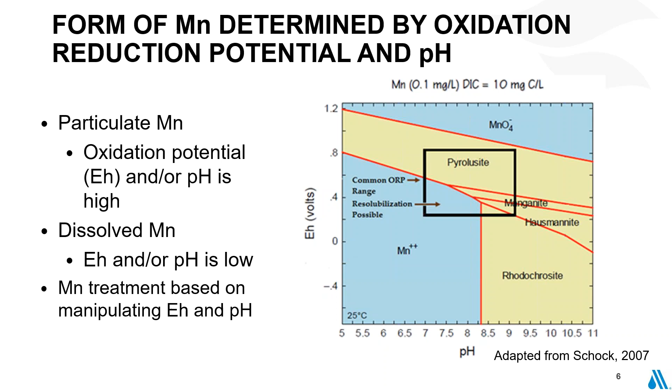At the same time, too, this also explains what happens when we have discoloration of water from manganese, say in our distribution system. We have a solid form of manganese that's precipitated on the walls of pipes. We see a change either in the EH or the pH. We dissolve the manganese, and then that ultimately becomes available for discoloring the water. So if you understand this diagram, you really understand why manganese is a problem and also why we can treat it or how we can treat it.

So moving away from the chemistry, I want to talk a little bit about how we can manage manganese in our sources. In particular, if we have lake or reservoir sources, surface water sources, we have a situation where there's two ways that we can control manganese, not really by treatment, by source water control.

I think most people are aware if we have a lake or reservoir, that will typically stratify on a yearly basis. When the water stratifies, the bottom of the reservoir will typically have manganese sediments that release manganese into the hypolimnion, or the bottom of the lake, as oxygen is depleted in the hypolimnion.

So one way that we can manage manganese, and I've worked on projects where this is very effective, is to use a multiple intake and withdraw water from that reservoir or from that lake away from the hypolimnion and avoid the presence of manganese. Another source water control is reservoir aeration.

And I've also worked on projects like this that have actually worked very effectively as well. What we do in this particular situation is, if we have a stratified reservoir, we inject oxygen to the bottom of the reservoir. The oxygen oxygenates the water, prevents the manganese from solubilizing into the hypolimnion, and that makes it so we can still withdraw water from the bottom of the reservoir without sucking up discolored water or water containing manganese. So these are two very effective source controls for manganese.

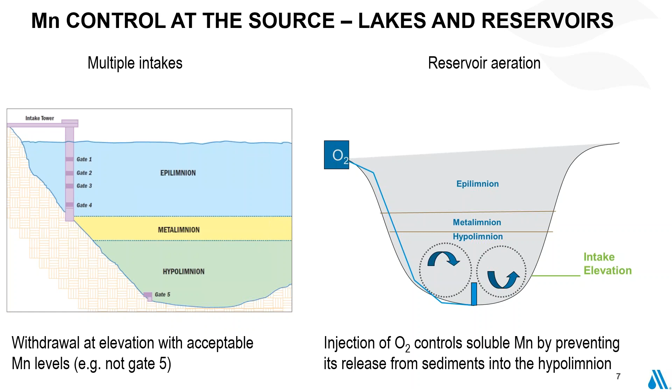From there, I'd like to go into treatment options. And I think actually John's going to talk about this a little bit more detail later in the presentation. But if we get to the plant, we really have a number of different options that we can use for treating manganese. And these options depend upon if the manganese is dissolved at the time it reaches the plant or if it's particulate. If it's dissolved manganese, we have the opportunity to biologically oxidize it and treat it. I'll talk a little bit more about this in another slide.

Another opportunity is to take the dissolved manganese and adsorb it on a manganese oxide coated surface. This is typically called a green sand process. Or the third way to manage it is to take the dissolved manganese and oxidize it to a particulate form. We can either destabilize it through coagulation and filtration, or if we get large enough particles, we can go directly to filtration and treat the manganese.

If we have particulate manganese entering the system, it may be possible to directly remove it as a particulate, or it may be necessary to remove the particulate through coagulation and flocculation. But as you can see, we have several different ways that we can treat manganese at the treatment plant.

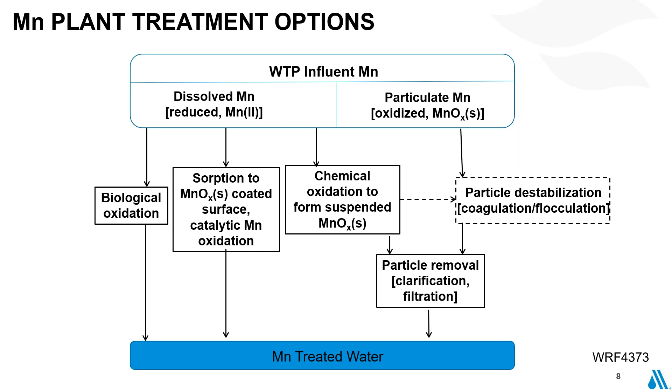Key to the treatment of manganese, typically if we use a process involving oxidation and filtration, is to use several different oxidants to oxidize manganese. There are three strong oxidants we can use: permanganate, chlorine dioxide, and ozone. I think the vast majority of systems depend upon permanganate oxidation, and typically this is the oxidation process that works best.

It's typically easy to add, and it's effective for controlling manganese. Probably the biggest issue with using permanganate is one has to be very careful with the dosing. I've worked on a number of projects where the manganese issue was driven by overdosing permanganate, exceeding the amount that is really necessary to complete oxidation.

A second oxidant that's effective for pre-oxidizing manganese is chlorine dioxide. It's very effective, an excellent disinfectant, and good for taste and odor control. The issue with chlorine dioxide is that the amount you can add is limited by chlorite formation. Typically, if you have a relatively large amount of manganese and any other demands in the water, you're going to reach the limit of the amount of chlorine dioxide you can add.

A third oxidant that can be used is ozone. As a pre-oxidant for manganese, ozone has some limitations, and typically the problem is it tends to form colloidal manganese, which is much harder to destabilize and treat than if you've formed particulates with chlorine dioxide or permanganate. But ozone has become a much more important issue in terms of manganese treatment because we're seeing a lot of systems moving to biological processes using ozone to stimulate those processes.

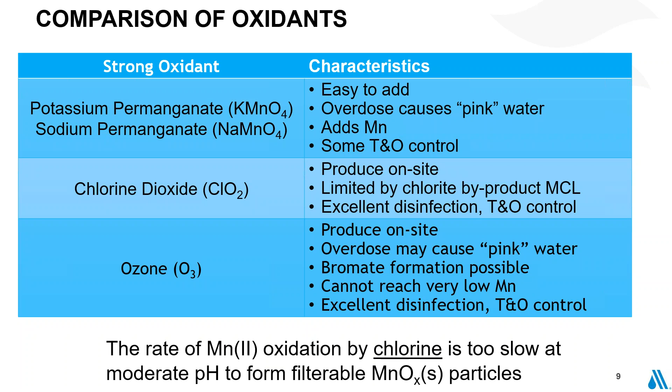I'd like to move into biological treatment, which is becoming a much more important issue with manganese. Certainly, as an intentional treatment solely for manganese, biological treatment can be very effective. But what we're seeing more is biological treatment being a byproduct or co-treatment objective as systems go to biological filters and have a certain amount of manganese that has to be controlled at the same time.

Similar to the EH-pH diagram we looked at before for chemical treatment, there is a range of pH and EH values that optimize biological oxidation of manganese. Typically, to optimize or operate for biological treatment, you're going to have to operate in a pH range in this area here. Biological treatment can be very effective, but it's also sort of on the fussy side, and there are a number of unique considerations that need to be taken into account when implementing it.

Clearly, there's a temperature dependence—there's usually a threshold under which biological activity drops off, so the biological removal of manganese will drop off as well. Anytime we use a biological system, there's a potential for head loss because of the byproducts of biological activity. If the biological process is interrupted, manganese can be released, and there are issues when restarting a system about how long it takes to get the biology in place, along with issues with media type, empty bed contact time, and possible needs for supplementing nutrients to make the biological process work. So biological treatment can be very effective, but it's also a more fussy treatment that you're going to have to be more careful in looking at.

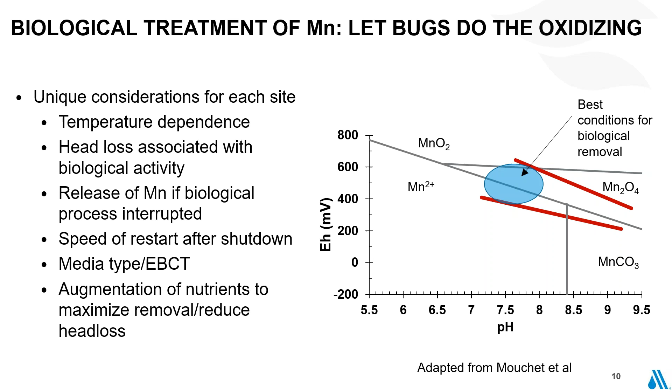Now, moving away from treatment, I'd like to move into the fate of manganese in distribution systems. One of the key points I want to make is that you not only have to worry about how you're going to treat manganese, but you have to be concerned about what happens to it once it's out in the distribution system.

We have to keep the concept here of accumulated manganese. If we do a quick mass balance on this system, the manganese that gets into a treatment plant is either through the raw water, or maybe some chemical contamination, but that manganese either gets removed and exits the plant as a residual, or it goes out into the distribution system. Any amount of manganese that doesn't end up at the customer tap will generally end up depositing in the distribution system.

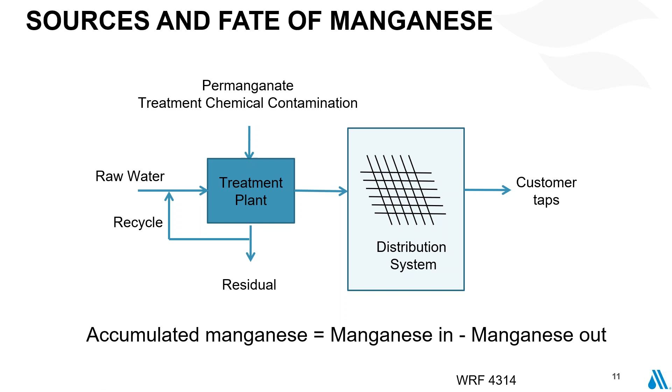This could be quite an issue. This was a project we worked on several years ago looking at the effects of legacy manganese in distribution systems, or the manganese that is accumulated in distribution systems. The point here is large amounts of manganese can accumulate in distribution systems. Manganese is easy to oxidize, it's easy to form a solid, and once it sorbs, it's pretty resilient. It wants to sorb to a number of different surfaces.

The other issue you have to keep in mind too is that once manganese is in the distribution system, it can impact corrosion scales, including lead scales. In a project we worked on with Water Research Foundation, we tried to characterize some of the issues involved with the accumulation of legacy manganese in distribution systems.

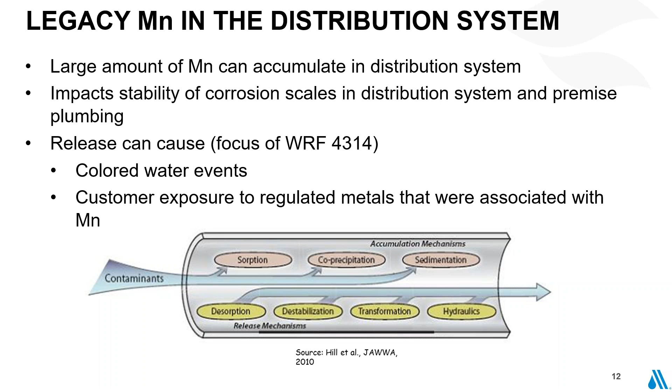The clear issue here is colored water events - if the manganese gets destabilized, it can color the water and cause colored water events with customers. But at the same time, when manganese releases, it also can release metals that have been sorbed to those solids in the distribution system. So in addition to having colored water, there's the possibility of releasing metals at the same time when manganese destabilizes and causes a colored water event.

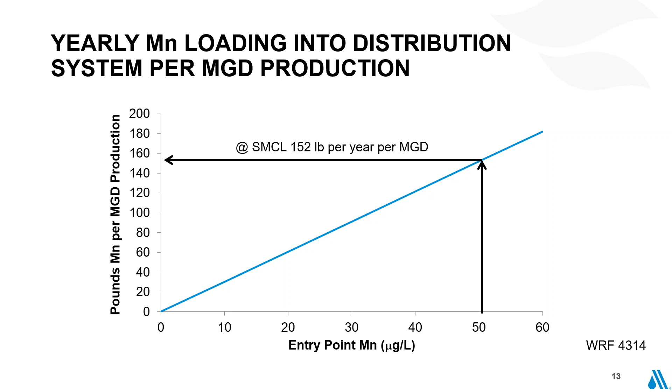Now, the question is, do you really get a good deal of manganese? How much manganese can you get in a distribution system? Just a rough calculation we made, looking at the entry point level of manganese going into, say, a distribution system, and the pounds of manganese that creates as a result of an MGD of production on a yearly basis. If we look at the current secondary MCL, for every MGD produced on a yearly basis, you're providing about 152 pounds of manganese into the distribution system.

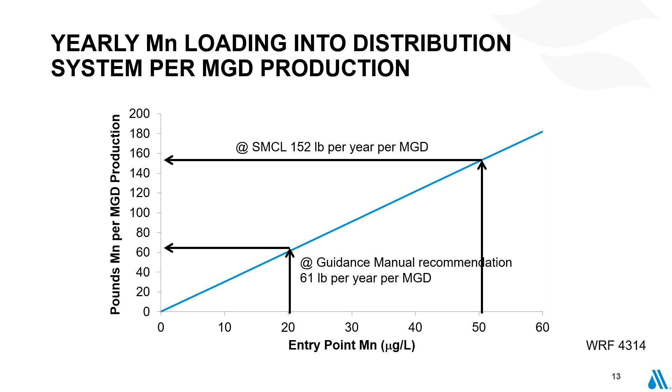Even if we go to a much lower level, consistent with the guidance manual we put together or with the Health Canada guidance, you're still putting about, theoretically, 61 pounds of manganese per MGD per year into your distribution system. So theoretically, it's possible to put a lot of manganese into the distribution system, and this manganese can, in fact, accumulate. So the question becomes, does it actually accumulate? And in fact, it does.

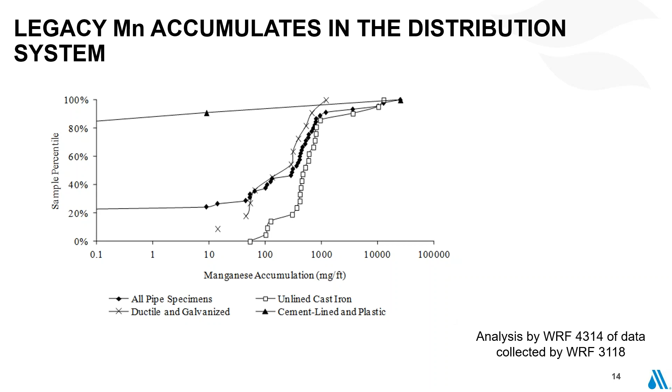Looking at a Research Foundation project I worked on with Melinda Friedman, we took information from a prior study she had done and gave estimates of the amount of manganese you can have in distribution systems, as a function of different pipe materials and different specimens that were taken. A couple things came out of this study: one, manganese can accumulate on a number of different pipe materials, and two, the amount of manganese that can accumulate in a distribution system can be fairly significant.

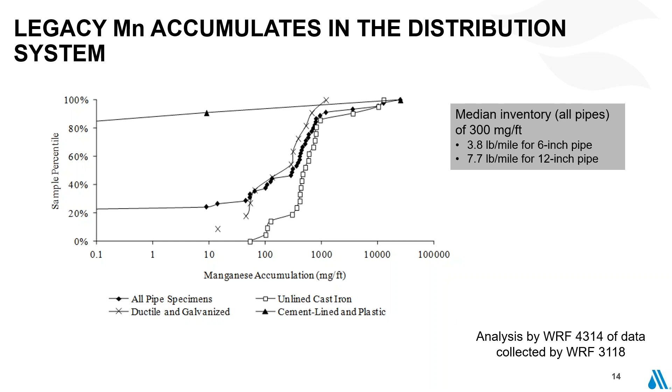The median value for the study was about 300 milligrams of manganese per foot of pipe. If you look at this as either a 6 or 12-inch diameter pipe, that's on the order of 3 to 7 pounds per mile in distribution system pipes. So clearly it's possible that a large amount of manganese can accumulate in distribution systems. And once that manganese is in the distribution system, it's there and capable of being released and destabilized to cause colored water events and other undesirable events.

Since the completion of that study, I think we've gained a lot better understanding of the impacts manganese has on lead corrosion. And this is one area where we need to be a little bit more serious thinking about what happens in distribution systems with manganese.

Since the time of the study I was talking about, the Research Foundation study, there's been a number of papers published that have outlined other issues that manganese has on lead corrosion. Some of the adverse effects include the presence of manganese tends to form more amorphous lead scales. These scales are less resilient and more easily released. Presence of manganese can also interfere with the use of corrosion inhibitors and reduce the resiliency of scales formed by those corrosion inhibitors.

I think people have been aware for a long time that manganese can act as a scavenger for lead. It has a high sorption capability for lead, so once lead absorbs onto a manganese scale, if that scale destabilizes, it can serve as a source of transport of lead. It can also act as an electron acceptor during lead oxidation and facilitate the release of lead.

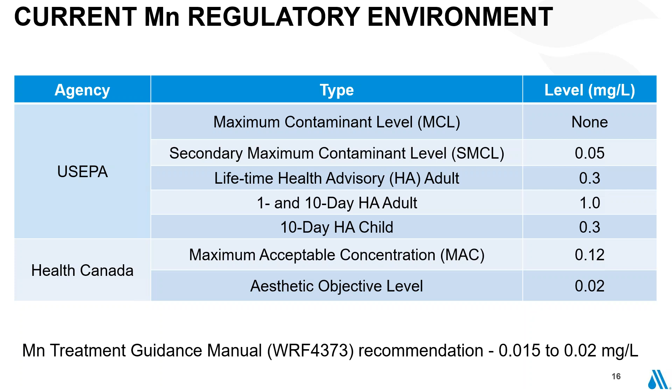So I'd like to investigate a little bit about the current secondary MCL, and perhaps this is a little bit controversial, but really the secondary MCL is inadequate at the present time. Basically, the EPA rationale that backs up the MCL is purely based on aesthetic effects, specifically staining, discoloration of water, and bitter metallic taste.

In fact, if we look at research that's evaluated where we actually see these aesthetic effects relative to the secondary MCL, what we find is there's really no correlation between the secondary MCL and the aesthetic effects. As a matter of fact, color, as most people are aware, staining can occur at levels many times less than the secondary MCL, documented up to an order of magnitude less in concentration. At the same time, from a color perspective, manganese can also be transparent at levels many orders of magnitude greater than the secondary MCL.

And the taste threshold for manganese really doesn't make a whole lot of sense either. As a matter of fact, it's many times greater before you can actually detect the taste from it.

So basically, the point I'd like to make is that at the present time, the secondary MCL is not only technically wrong, but it can even be counterproductive because it provides a degree of safety that really isn't there. It can even be misleading, because in many cases concern about manganese has revolved around whether it's self-protective—whether people will not drink discolored water, or water containing high levels of manganese, because it's discolored. But in fact, we can have situations where there are high levels of manganese in the Mn2 form in the water, and you can't taste it and you can't see it.

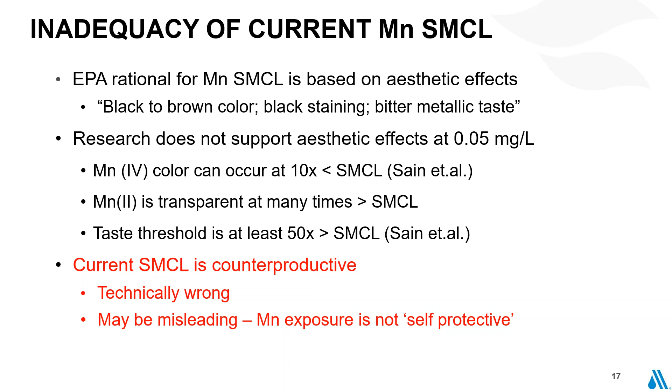A point for utilities here is that you need to be thinking about controlling manganese to something much lower than the secondary MCL.

The second thing I'd like to point out is comparing the health advisory to the Canadian MAC. The health advisory for manganese, our current standard for evaluating health effects, was finalized in 2004, based upon nutritional studies completed from the 1960s to the 1980s. So the health effects information in the current health advisory is about 30 years old.

If we look at the Canadian health maximum acceptable concentration, established in 2019, this is based on studies completed in the 2000s, looking at various impacts to intellectual development and impacts on children as the justification for the MAC.

There's been considerable work, not only considered in the Health Canada MAC but in other factors as well, looking at childhood development and neurological impacts. One study I found reviews over 30 papers published after the EPA health advisory that indicated issues with childhood development not considered in the current advisory.

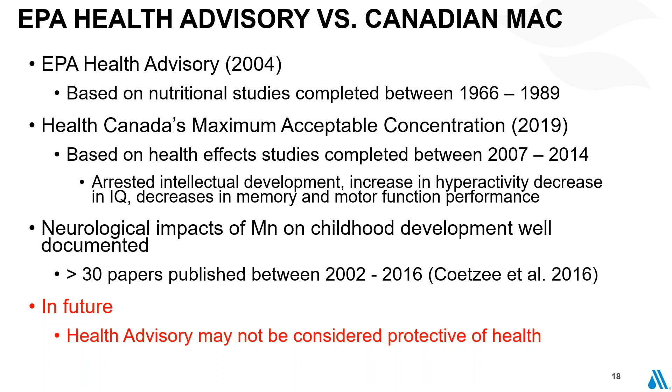What this really means is that, from a health perspective, we may not be able to depend upon the health advisory as giving us appropriate guidance in terms of the health risks for manganese in drinking water.

So with that, I'd like to wrap things up in terms of the learning objectives. Hopefully I've been able to point some of these things out. First, there are many different options available for the management of manganese. These can be both source control and treatment.

Second, we really have to appreciate the issues of accumulated manganese in distribution systems. Utilities not only have to manage manganese at their source or at their plant, but they also have to be concerned about how they manage it in their distribution system.

Finally, when it comes to setting an appropriate standard to control to, I'd argue the regulatory guidance doesn't provide a whole lot of help right now. Utilities really have to be thinking about managing manganese to levels substantially lower than what's implied by the secondary MCL or the health advisory.

So with that, I'd like to point out I've referred to a couple of different studies that are the source of many of these works. First is guidance on treatment of manganese, which I did with Bill Knocke, John Tobiason, and Sarah Clark, which I still think is a pretty good outline of the different treatment techniques and technologies available for manganese.

I'd also like to point out, if you're interested in understanding the effects of accumulation of manganese in distribution systems, work I did with Melinda Friedman and Andy Hill looks closely at the negative impacts of manganese in distribution systems. With that, I appreciate your time and hopefully provided some good information for people to think about today.

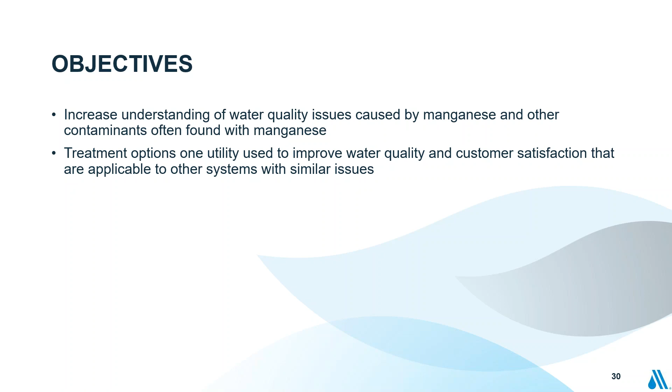A little bit of background on the Maplewood well field: it was developed in response to a series of underground storage tank leaks, a pipe leak, and an overturned fuel truck near their major well field.

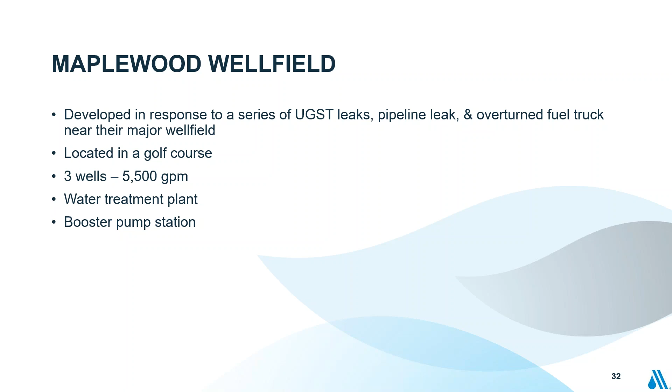Following these occurrences, the city purchased a golf course and installed 3 wells there with a combined capacity of 5,500 GPM. They also installed a water treatment plant and booster pump station at the site.

Some of the previous work done when they put that treatment plant in was installing air stripping for removal of hydrogen sulfide. To strip the hydrogen sulfide, they ended up adding sulfuric acid to drop the pH, then had to raise the pH back afterwards with caustic soda. They attempted to sequester the manganese in the water, and belatedly found out they had an issue with ammonia, so they ended up with a chloraminated facility.

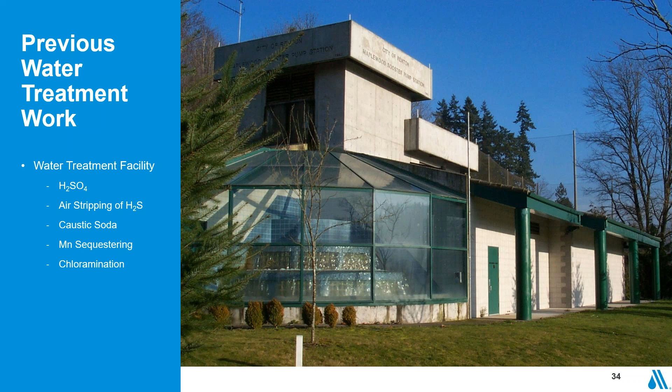A little background on hydrogen sulfide and why they needed to drop the pH: around pH 7, about 50% of the hydrogen sulfide is present as H2S, and about half as bisulfide. But around pH 8 or so, about 90% is bisulfide, and bisulfide is not strippable. The only thing you can strip is hydrogen sulfide, so you have to convert it to H2S, which required a high sulfuric acid dose, and then a very high sodium hydroxide dose to bring the pH back up after treatment.

One of the problems that resulted was the wells tended to go on and off depending on demand, and every time they shut down, the sulfuric acid feed at the injection point would leak a little bit into the pipe, and they ended up corroding the ductile iron pipe at the injection point and had to replace it.

Another problem they had was a lot of odor issues on the golf course, including the 19th hole where they had dining facilities, so they were getting objections from golfers and diners. They were also experiencing corrosion inside the water treatment facility, both hardware and electrical panels. And out in the distribution system, they were having taste and odor complaints because of remnants of sulfide left in solution.

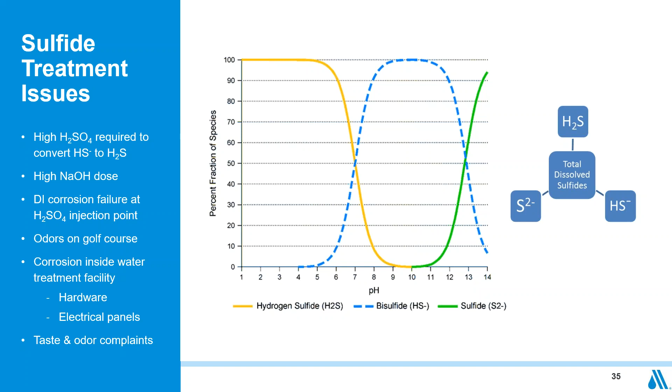Regarding the ammonia and manganese issues, they discovered after startup that they had ammonia. Typically, most inorganic analysis in the Northwest doesn't test for ammonia unless specifically requested. So when the water was introduced in the distribution system, they discovered they didn't have any free chlorine, and found out they had about 4 to 5 tenths of a milligram per liter of ammonia, so they ended up having to segregate their distribution system.

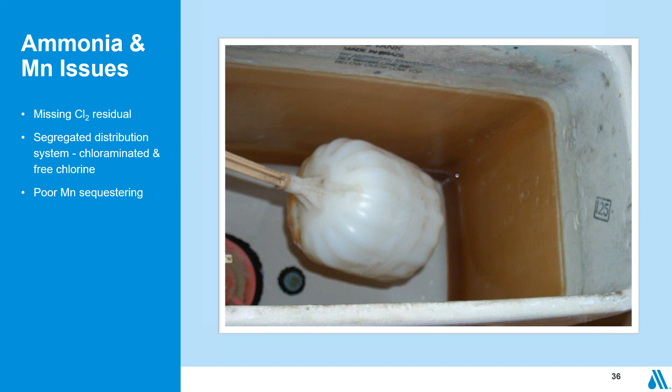The area served by the Maplewood supply was chloraminated, while the rest of the distribution system was a free chlorine system. They were also getting a lot of deposition of manganese in the distribution system. The polyphosphate sequestering agent they were using did a poor job, and in this particular toilet water tank you can see a lot of manganese deposits, and people were having deposits in their dishwashers and clothes as well.

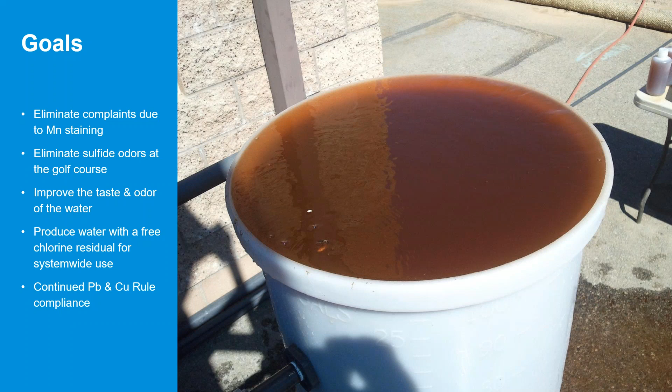Some of the goals of the study we did were to eliminate complaints due to manganese staining, eliminate sulfide odors at the golf course, and improve the taste and odor of the water. We also wanted to produce a water with a free chlorine residual for system-wide use, and continue compliance with the lead and copper rule.

For the treatment evaluation, we looked at manganese, aiming for adsorption of the manganese on manganese oxide media, followed by catalytic oxidation with chlorine. For sulfide, we looked at oxidation and also catalytic GAC. For ammonia, we looked at clinoptilolite and also breakpoint chlorination. We also did taste and flavor evaluations on water sampled following the pilot plant.

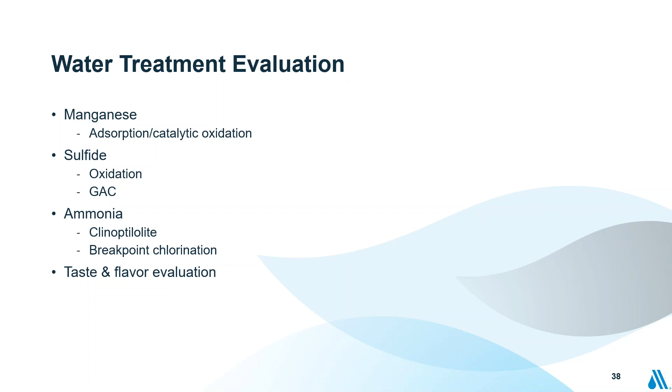For manganese, we were looking at adsorption and catalytic oxidation, and we looked at 3 different medias. The media on the left had 36 inches of pyrolusite. The media in the center consisted of 15 inches of green sand and 21 inches of anthracite. The media on the right was manganese oxide coated silica sand, 15 inches capped with 21 inches of anthracite. You can either allow the manganese oxide to naturally develop over time on the silica sand anthracite, or as we did in this case, pre-treat the media with potassium permanganate overnight, as suggested in an AWWARF publication on removing soluble manganese from water using oxide coated filter media.

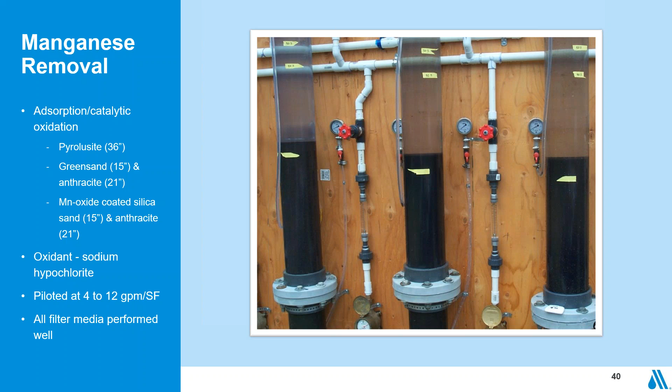The oxidant we used was sodium hypochlorite, and the pilot operated at 4 to 12 gallons per minute per square foot. All three medias performed quite well.

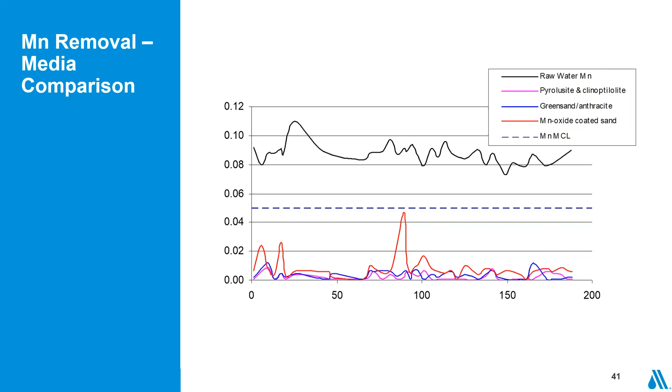So looking at one of the filter runs, this is run number 5. The y-axis is concentration in milligrams per liter, and the x-axis is time of the run in hours. The pyrolusite and green sand were consistently below 0.01 milligrams per liter of manganese in the filtered water. We had a few excursions with the manganese oxide coated silica sand anthracite, but I suspect if we'd run the pilot plant longer, we'd have gotten more deposition of manganese oxide, and those levels would have come down over time.

For run 5, we were targeting a filter loading rate of 12 GPM per square foot. One thing that helped was our iron concentration was quite low, so we weren't accumulating a lot of iron in the media. We ran the filters for about 8 days, with UFRVs ranging from 108,000 to 120,000 gallons per square foot, and we were operating with a chlorine dose of approximately 5 milligrams per liter.

The average manganese for all 3 media were well below 0.01 milligrams per liter, below some of the numbers Phil was suggesting. We were also able to remove most of the sulfide, typically operating with free chlorine around 1 milligram per liter in the filter effluent. But total chlorine was in excess of 2 milligrams per liter because we had not gone through breakpoint.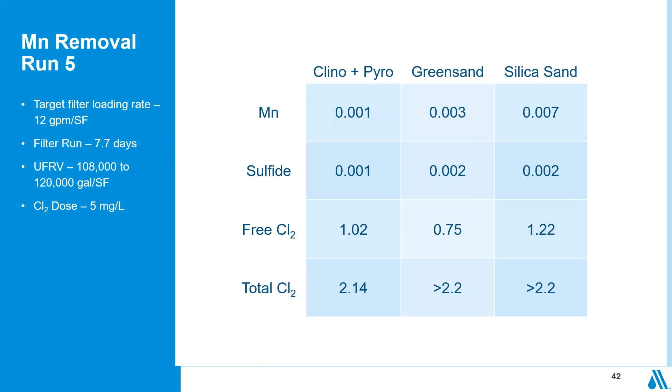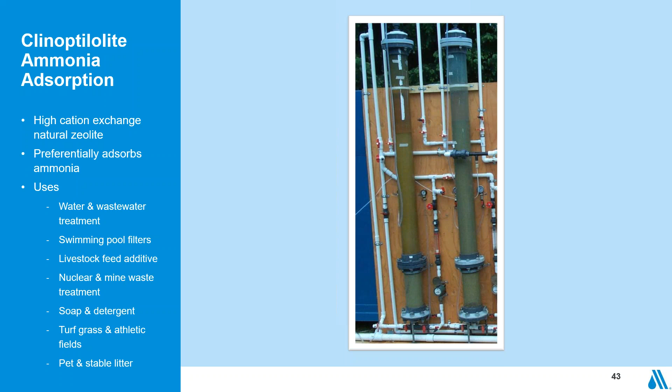In the early runs, we were looking at clinoptilolite for ammonia adsorption upstream of the manganese filters, so we could reduce the chlorine demand. Clinoptilolite is a high cation exchange natural zeolite that tends to preferentially adsorb ammonia. It has a number of uses in water and wastewater treatment, and it's also used in kitty litter for controlling odors.

As indicated, it was upstream of the manganese filters. You can regenerate clinoptilolite with about 4 pounds of sodium chloride per pound of ammonia, and we were getting about 20 days per run. We were looking at an empty bed contact time of 12.5 minutes, and got good ammonia removal operating at 3 gallons per minute per square foot. However, when we tried to load it at higher rates, the performance deteriorated.

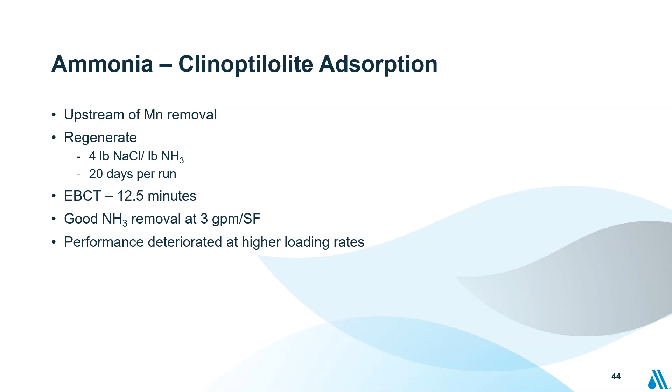We eventually switched away from the clinoptilolite and just looked at breakpoint chlorination for ammonia removal. We had a high and variable chlorine demand, with the theoretical demand to get through breakpoint being 7.6 parts of chlorine per part of ammonia. Our bench study indicated we were operating a little over 10 parts per part, and it required significant post-manganese filter contact time.

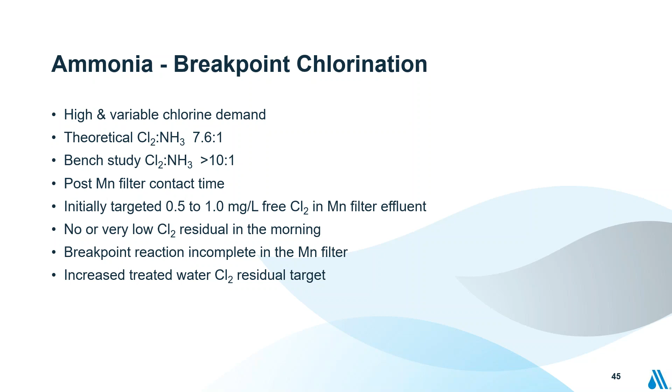We initially started out targeting 0.5 to 1.0 milligrams per liter free chlorine in the manganese filter effluent, which is commonly used for adsorption catalytic oxidation. What we found is samples collected in the evening, when we came back in the morning and measured the chlorine again, we had very low or no chlorine residual remaining, because the breakpoint chlorination was continuing—it was incomplete going through the filter. As a result, we increased our treated water chlorine residual target.

This is a decay curve from one of the bench scale runs, with time in minutes on the x-axis. We started out with free chlorine, or total chlorine, in excess of right around 2.5 milligrams per liter, and as the breakpoint reaction continued, it closed in on the free chlorine. So we ended up selecting a chlorine contact time of about 90 minutes to go through breakpoint.

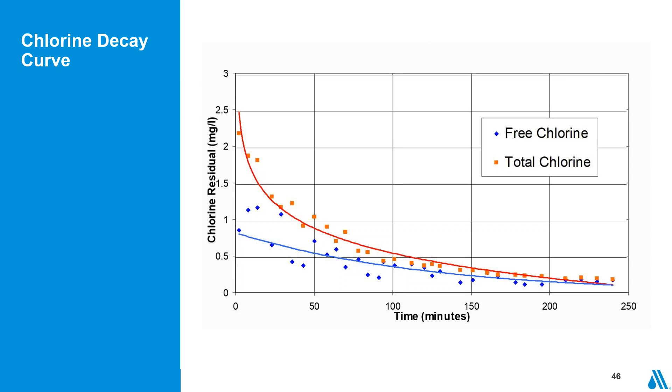Some sulfide removal options you can look at: one is aeration, which in the case of Renton they were using, and they were dissatisfied because of the odors they had, plus the high acid and base requirements. Another method is oxidation. Typically, depending on the reaction, it requires 2.1 to 8.3 milligrams of chlorine per milligram of sulfide, depending on the endpoint—2.1 is when you're converting to elemental sulfur. However, a lot of times you end up producing polysulfides and sulfites as well as sulfate.

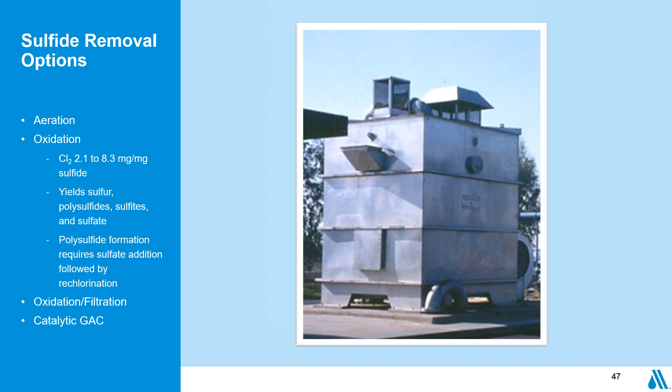Muskowitz and Ainsworth developed a methodology for treating polysulfide formation, which we felt was probably part of Renton's problem. That involves the addition of sulfite, which converts the polysulfide to thiosulfate, followed by rechlorination. Other options are, if you're able to just oxidize it to elemental sulfur, you can remove it by filtration. And the one we settled on was catalytic GAC.

So with catalytic GAC, we put that in front of the chlorination process. Basically, the catalytic GAC adsorbs the sulfides, and then in the presence of dissolved oxygen, it catalytically oxidizes it to sulfate.

An excess of dissolved oxygen is required because you need to maintain an aerobic condition throughout the GAC bed, because if the lower part of the bed happens to go anaerobic, you can convert the sulfate back to sulfide.

We were looking at an empty bed contact time of 3 to 5 minutes, and we were reducing the sulfide from 0.12 milligrams per liter to 0.002 milligrams per liter.

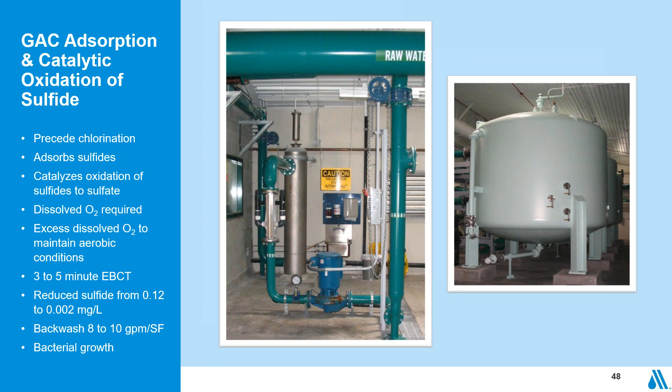Typically we'd backwash the GAC at about 8 to 10 gallons per minute per square foot. The bed will go biological, so you will have biological growth in the bed.

So one of the things we did was, once a week after each filter run, have a panel consisting of city personnel and interested customers from the Maplewood service area do a simplified taste and flavor evaluation, quite a bit simplified versus what has been published in some of the AWWA publications. We had them do a blind taste test and rank it from 1 to 5, varying from awful to very good. Then for waters identified as mediocre and below, we had them give us their idea of what taste or flavor they were observing.

The different waters we ran the taste and odor test on: we used bottled water as a control. They also took water from City Hall, which was getting water from their other major well field, which people seemed to like, and that was our gold standard. We also took water from Maplewood at City Shops, which was receiving chloraminated water from Maplewood, and then water from the different pilot filters: clinoptilolite only, then clinoptilolite followed by adsorption catalytic filtration, clinoptilolite followed by adsorption catalytic filtration plus bisulfite addition then rechlorination, and lastly GAC upstream of the manganese filter followed by breakpoint chlorination.

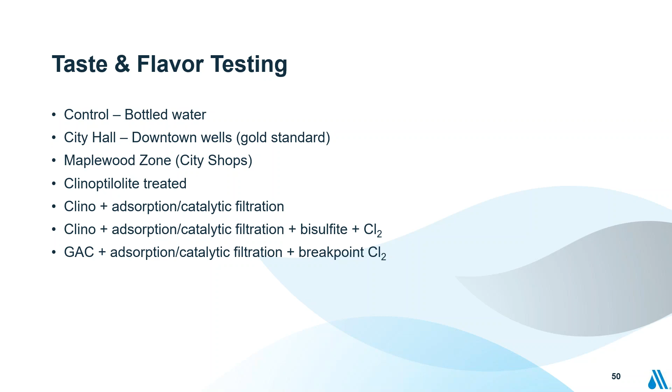So on average for the test, the bottled water was considered good tasting, and the water from City Hall they liked. When they got to water from the chloraminated system, it dropped down to the mediocre range. And we were getting quite poor taste and odor scores for the pilot filters coming from the pyrolusite, the green sand, or the silica sand, although the numbers did tend to improve if the water was held overnight and tasted the next day.

As a result of this, we ended up switching our treatment regime, looking at both the methodology used by Ainsworth and Muskowitz for treating the polysulfides, and also looking at green GAC to catalytically oxidize the sulfide prior to green sand, followed by breakpoint chlorination.

Based on the results, we ended up installing a side stream aeration for the water coming into the treatment plant to raise the dissolved oxygen, followed by catalytic GAC converting the sulfide oxidation to sulfide to sulfate. Then we chlorinated the water and went through adsorption catalytic oxidation to remove the iron and manganese, followed by breakpoint chlorination with a 90-minute contact time, and then they were able to rechlorinate and send it out into the distribution system.

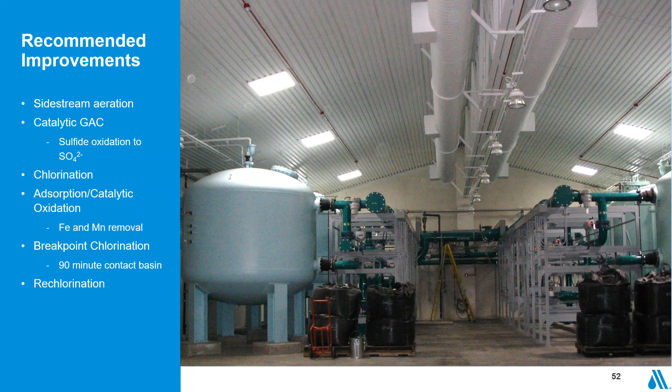Some of the lessons learned: not surprisingly, manganese sequestering performed quite poorly. A number of people have referred to manganese sequestering as just kind of putting a Band-Aid over the manganese, hoping you can keep it sequestered while it's in the distribution system before it causes any aesthetic issues.

We were able to get fairly high manganese filter loading rates with all three media. That was probably helped by the fact that our iron was quite low, which tended to limit the clogging of the media. We did get biological growth in the GAC early on.

The city didn't backwash fairly frequently on the GAC, and they did get clogging of that media. So after the first year, they ended up replacing the top 12 inches of the media, and they increased their backwash frequency to weekly, and they haven't had any issues since that time.

We feel that including customers from the area receiving Maplewood water in the taste and odor panel was beneficial and helped them buy into the project.

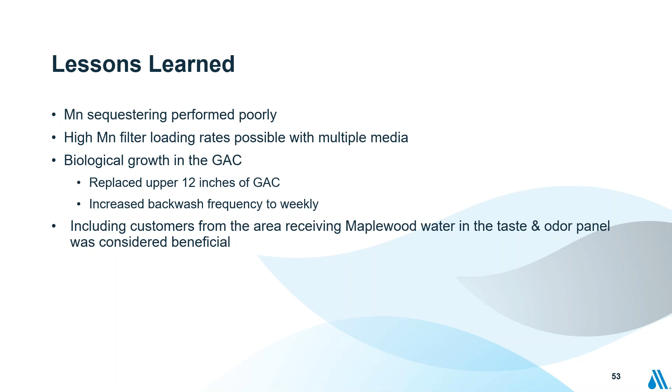We'd like to acknowledge some of the people who helped us on this project: J.D. Wilson and Ray Sled from the City of Renton, and Greg Pearson from HDR, who was our partner on the project.

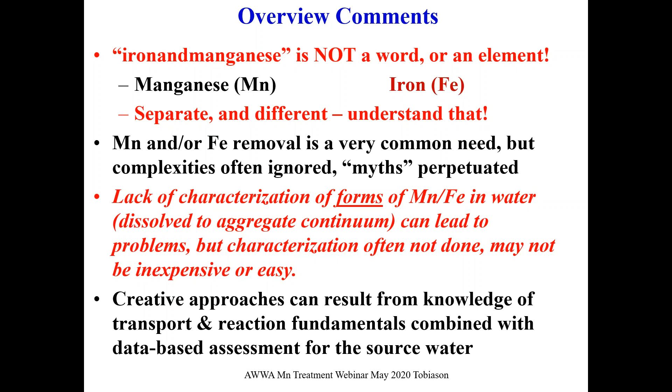So to me, removal of iron and removal of manganese can be simplified into either becoming a particle or getting to a surface. Becoming a particle usually involves adding an oxidant or making use of one that's available. We make various kinds of particles, and we do our particle removal steps, which need to be tailored to the particles we make. Or dissolved iron and dissolved manganese, which is usually the form they're in our source water when we're considering them a problem, in their reduced Mn2 and Fe2 form, get to a surface - we'll talk about those surfaces in a minute. They come off those surfaces as residuals, and we can get some great removal.

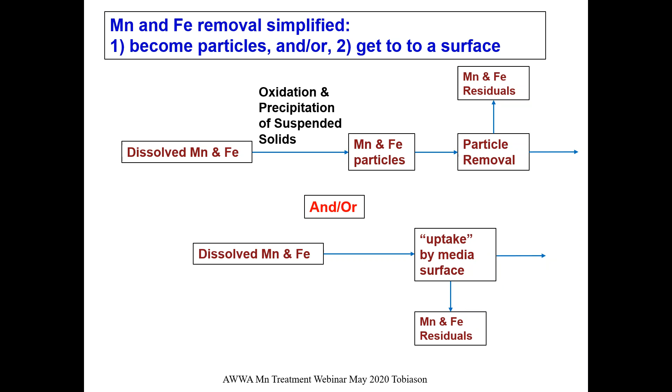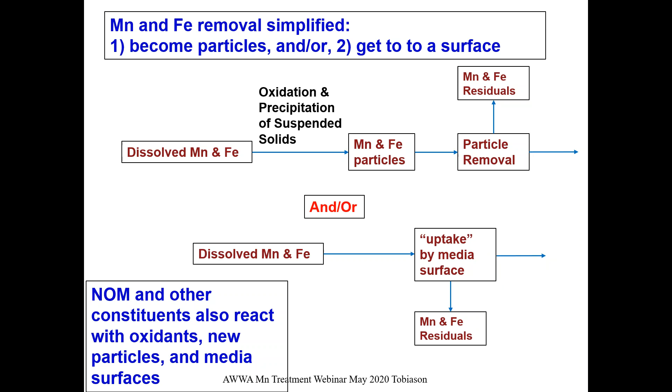Now, we also have to throw in natural organic matter and other constituents. Milt just talked about sulfide and ammonia, but those constituents react with oxidants, anything else we add, and also with the particles and media surfaces. So we have to keep all those things in mind when looking at complicated systems.

So let me focus on this path for a little bit, the particle removal side. A couple of schematics - we might have groundwater where we have an oxidant. Phil mentioned in his presentation that strong oxidants are needed for manganese removal in this scenario, whereas weak oxidants like oxygen and free chlorine are very effective for iron, but are not effective for manganese at the typical pH and time frame we have in treatment plants. It's not always true, but often is.

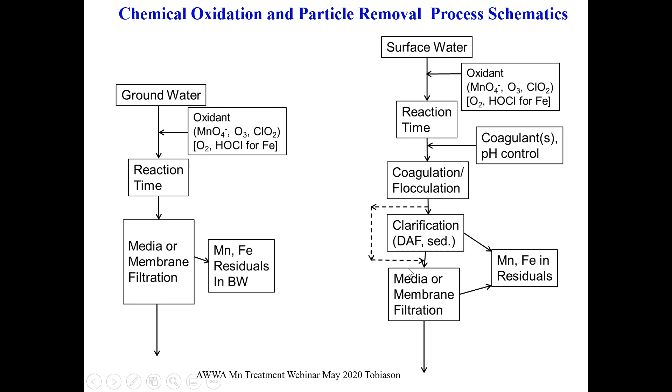So we need time, and then we can filter those particles out, usually with media or membrane filtration, and sometimes we have clarification in between. For surface waters, it's more common to have perhaps coagulation, flocculation, some kind of clarification step, and then media or membrane filtration. So these are some schematics that we might come across. I stress the importance of knowing the form of the constituent, iron or manganese.

So in the raw water, knowing the forms helps guide our selection and design of processes and operation. And if we want to look at what happens when we do any kind of chemical addition, oxidant, pH, coagulant, we need to know the form because it controls performance of the subsequent process. So it's important.

We distinguish forms, and some people use the word species for this, as particulate, colloidal, and dissolved. Usually we use some kind of membrane filter in the 0.2 to 1 micron range—call those particles that are greater. Things that pass through but are greater than a 32K or 100K molecular weight ultrafilter, on the order of 1, 2, or 3 nanometers in size, we call colloids. What passes through that, we call dissolved.

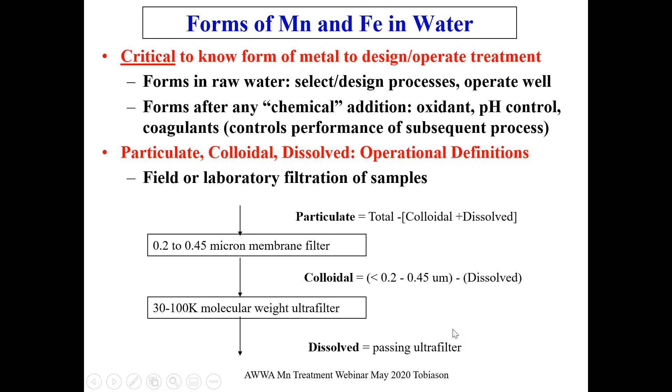You do this in a lab with a syringe filter for particles, then you need a pressurized cell with nitrogen and an ultrafilter to distinguish dissolved versus colloidal. That's the hard part, because no commercial lab does this—only a few academic labs and researchers do. The good news is that you can coagulate those colloids and use this simple separation technique to distinguish between them. In fact, it's important at full scale, that aggregation phenomenon.

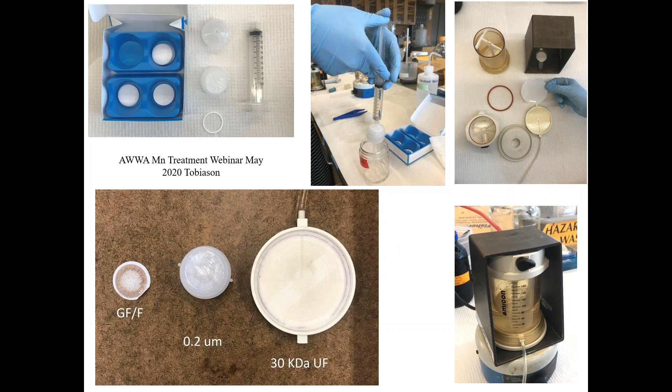As one example of treatment, this is some treatment of manganese, about 0.06 milligrams per liter in some raw water. This particular plant uses pre-oxidation at full scale with permanganate, followed by coagulation, followed by direct filtration. This is just an illustration that if you don't add an oxidant, you don't remove any dissolved manganese.

If we add ozone, we make some colloids and particles, and then when we coagulate and flocculate, we make particles and remove them. Particularly with permanganate, we make a lot of colloids, and then they become particles with coagulation and flocculation, and we remove them.

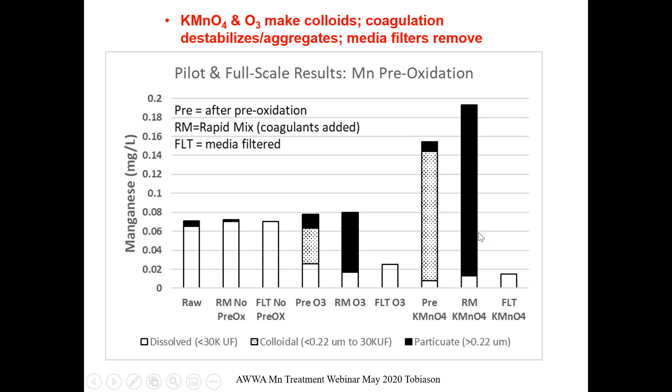The point here is that if we didn't measure this fraction—if I took out my syringe filter and measured dissolved manganese, which would be everything below here—I would think I had a lot of dissolved manganese, and I'd add more oxidant maybe to remove that. It would be exactly the wrong thing to do. It would make the problem worse. So having this distinction can be very important in operation and understanding of what happens across treatment.

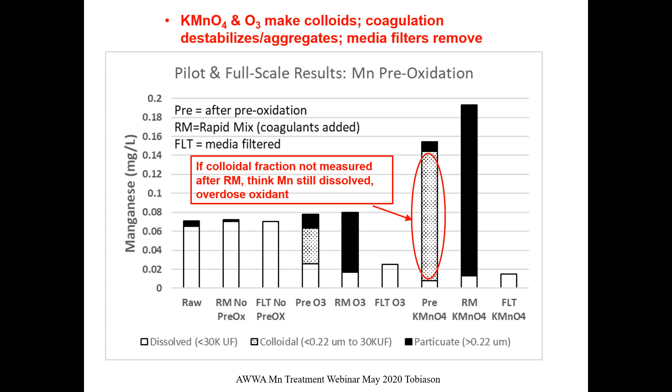So the first thing to do is go across the treatment plant and figure out what the forms are and what's going on. The two mantras about adding chemicals to anything you want done are how much and how fast. Stoichiometry is the fancy word for how much—how much iron or how much oxidant you need for iron and manganese.

At the end of this presentation I won't show it, but I have tables of the stoichiometric demand of different oxidants per iron and manganese. It turns out you need twice as much oxidant for a milligram of manganese than a milligram of iron. That's because of a 2-electron transfer for manganese and 1 for iron, but they happen to have similar atomic weights. You also have to add an oxidant to satisfy competing demands.

When you do make particles, as I mentioned, there can be some unusual effects of those particles on other dosing, so you need to follow that. Kinetics just means you need enough time, and how much time depends on the oxidant, the pH, the temperature, and competing demands. So again, it can be case specific—it can be extremely fast, or it can take a while.

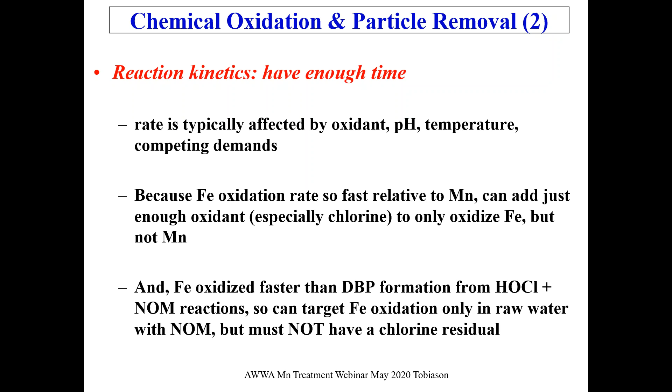I'm going to talk about some things with iron oxidation versus manganese oxidation that we can take advantage of for a particular treatment process for a mixture. Iron is really fast compared to manganese, so the oxidant is going to go there first, and then we can have some other options, which I'm going to describe.

Here's an example where we have iron, manganese, and NOM. We have a water, say raw here, could be any water. We dose an oxidant, could be any of those. What's happening is we have multiple parallel reactions, and multiple parallel reactions means the fastest reaction wins. The rate depends on the levels of the reactants and the fundamental kinetics of that reaction rate.

I've shown here iron 2 with an oxidant, manganese with an oxidant—we want them to go to particles, to oxidize. NOM with an oxidant, which might form, depending on the oxidant, disinfection byproducts we don't want, or oxidized organic matter. Then the NOM gets a chance to react with the metals that are precipitated, iron and manganese. So there's a lot going on here.

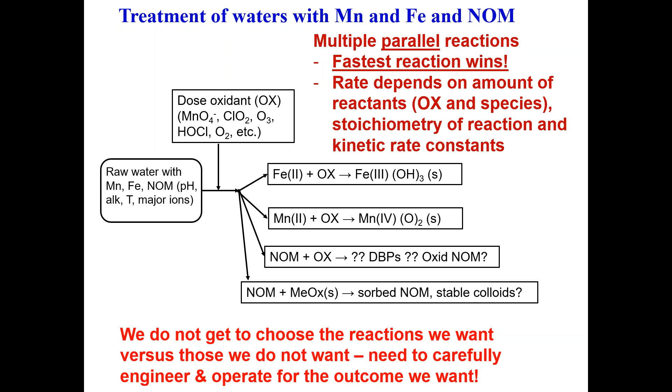One thing I want to point out is that we don't get to choose which reaction occurs. They happen because of the fundamental concentrations and rate constants for the conditions we're at. So we need to be selective and carefully engineer and operate systems to achieve the outcome we want.

One example of that is with chlorine and water containing iron, manganese, and NOM. I'll show you a plant later that uses some of this. So let's dose chlorine, and we've got iron 2, manganese 2, and NOM in there. Iron 2 reacts with chlorine and makes iron hydroxide. Manganese, in principle, can react with free chlorine and make manganese oxide. And NOM and free chlorine, we know, make some DBPs we don't want.

But we're lucky in this case in that the iron-free chlorine reaction is so fast that if we're careful with our dosing and just add enough chlorine to precipitate the iron, we don't get any DBP formation. So we can get iron oxidation with an oxidant we know how to use that's relatively inexpensive, and no creation of DBPs from NOM.

A couple of things can happen though. One is that we now need another approach for manganese because we haven't removed any manganese here — we haven't changed it from dissolved. And two, the natural organic matter can interact with the iron particles that are precipitated and might create some stable colloids that we have to deal with downstream depending on our treatment process. So: parallel reactions, fastest wins, and we can do some management and control of that.

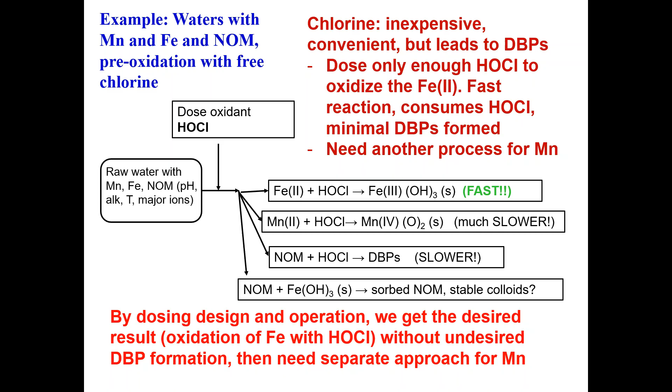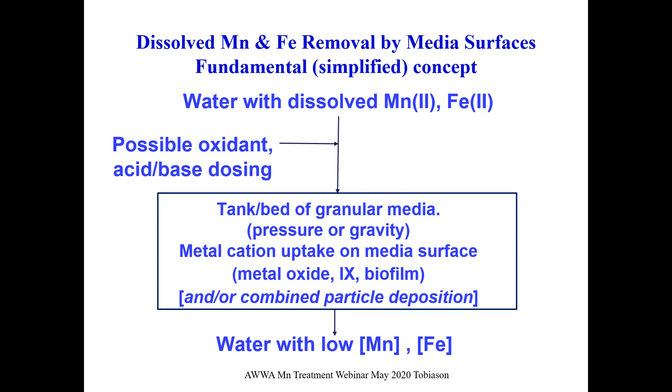So in terms of dealing with dissolved manganese in another manner, we can move on to using surfaces to remove dissolved manganese and dissolved iron. The fundamental simplified concept is we have dissolved iron and dissolved manganese entering some tank or bed of granular media. Milt already presented a lot of different names of media we might use. We have metal cation uptake on the media surface, and that surface could be a metal oxide like manganese oxide, an ion exchange media, or the biofilm of a biological process. In either case, dissolved iron or manganese gets to a surface and is removed via that surface.

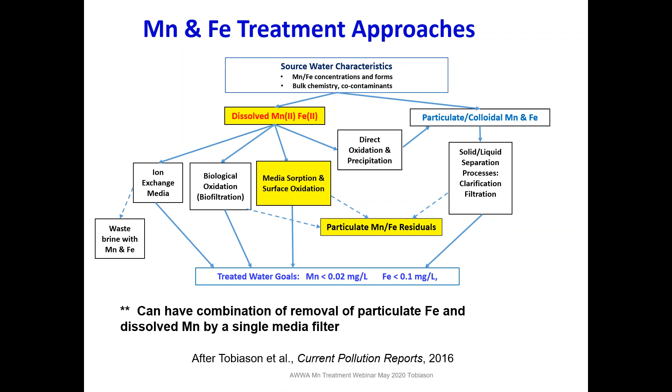So I'm going to ignore the ion exchange and the biology for a minute and just focus on the media adsorption approach, which I also refer to as sorption. In terms of the fundamentals, it's a two-step process where the dissolved cation is adsorbed to a surface — here I'm using a manganese oxide surface because that's really effective for manganese and iron adsorption — and it removes the dissolved species. But out in solution, we might have an oxidant, or we might apply one when it wasn't there, and it regenerates the media surface by oxidizing the metals on the surface, creating a new oxide surface that can do more uptake. So we often call this an autocatalytic process.

We can recreate or oxidize the surface we want by two fundamental methods: continuously, or intermittently. For continuous, I mean the oxidant's always in the influent. If the oxidant oxidizes the reduced metal in solution, then it creates a particle, and now we have particle removal, not adsorption. For manganese on an oxide surface, free chlorine works well because it's too slow to oxidize it in solution, but oxidizes it fast when the manganese is adsorbed. Oxygen does not work in this same manner, unfortunately, which it would be nice if it did. Strong oxidants can work in principle by this mechanism, but usually oxidize the metal in solution to make a particle. So for iron removal, it's typically mostly by particle formation and deposition when we have continuous oxidants in the feed.

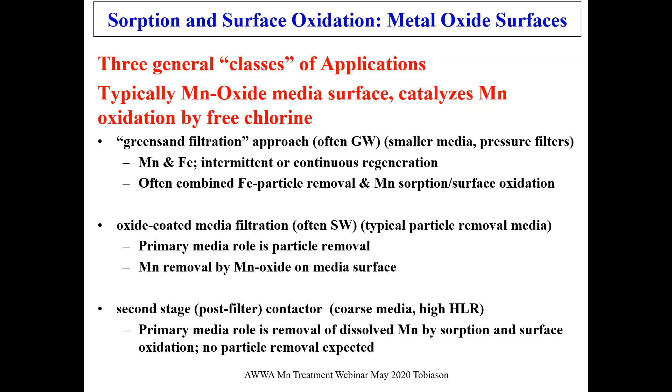The typical greensand approach is that we may or may not have a preoxidant, such as free chlorine or permanganate, and it might oxidize the manganese before it gets to the filter, producing particles. That would be the case with a strong oxidant, but usually not chlorine for manganese. Iron, however, usually becomes particles.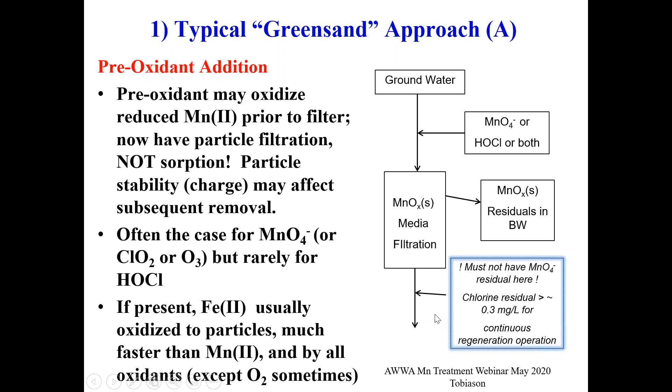I have a couple of points about permanganate. We basically can't afford to have much permanganate, or any, entering a media filter, because then we risk having that permanganate in the effluent, or colloids resulting from the reduction of permanganate Mn7 to Mn4 leaving the media. It's a difficult place to be. A lot of utilities who add permanganate ahead of these filters think it's reaching the media, but the only time I know it really is, is when they have a pink water problem, because it goes through the media. We just don't often measure what's going on.

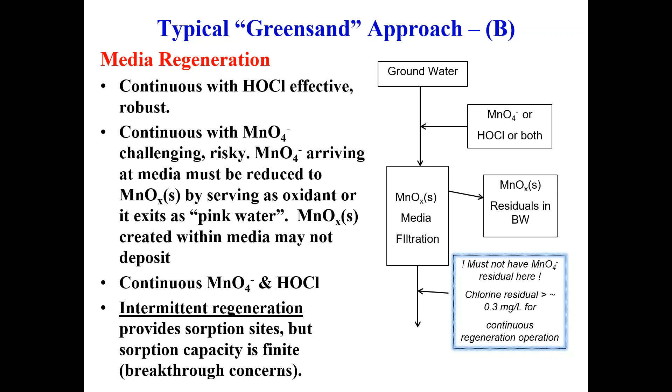For media regeneration, continuous dosing with free chlorine is effective, but getting permanganate to the surface continuously is risky business. Intermittently, we most likely use permanganate.

The oxide-coated media in filters - we've done a few publications about this. Milt referred to one, a study Bill, Aki, and I did of a lot of media filters, a WRF publication. Milt referred to a procedure there for coating that I'll comment on. Here again, we ask the media to take out particles but also do manganese removal. It's extremely robust, works great as long as we carry a chlorine residual through the media, but there are concerns. One is that without that chlorine residual you might release manganese, and the other is that we increase DBP formation by applying chlorine ahead of the filter instead of after, basically due to continuously exposing sorbed or media-related NOM to new chlorine, creating more DBPs.

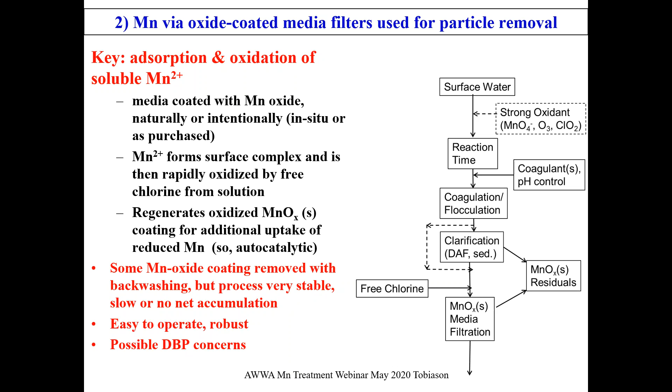One approach to solve that problem is to first remove as much NOM as possible, and then use a contactor that only sees free chlorine and is asked to remove dissolved manganese. We call it a post-filter contactor, or a third stage contactor, or second stage, but it can work very effectively. We have an example I want to show you.

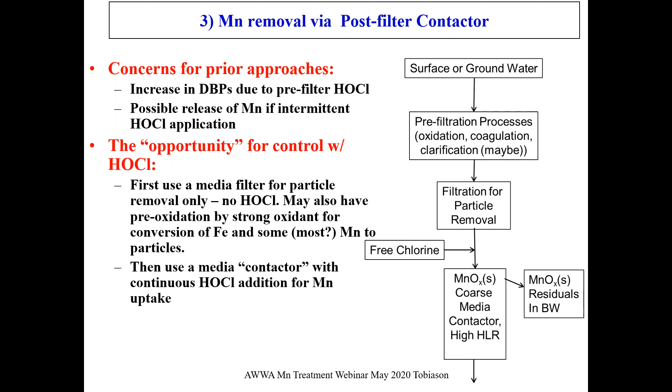This particular case is one we wrote a paper about in January 2016 for AWWA - the Lantern Hill Plant, Aquarion Water Company in Connecticut. Prior to 2013, it was a single-stage direct filtration plant with free chlorine, permanganate, base, and polymer added, and an anthracite over green sand media filter. We found we had to have a really significant free chlorine residual leaving the filter to avoid manganese release, and unfortunately that combination basically made the filter a DBP factory, producing very high levels of DBPs. Through pilot studies and lab studies, we worked with Aquarion, and they built a full-scale plant that came online in July 2013, moving to two stages.

Unlike the case Milt mentioned, this one has a lot of iron - a reasonable amount, 2.5 milligrams per liter, manganese about a tenth of that, and some TOC. We can add a preoxidant, either free chlorine or permanganate, to oxidize the iron. With free chlorine, you have to do it carefully so you don't make DBPs - just enough to oxidize the iron. The cationic polymer directly precipitates some of the NOM and aids in particle removal, and the base is there to raise the pH to about 7.5 from 6.5 in the raw water.

Then it goes through dual media filtration for particle removal, which takes care of all the iron and some NOM. We add enough free chlorine to a manganese oxide coated ceramic media that's about 2 millimeters in diameter, 40-inch bed depth, operated at 10 GPM per square foot. It doesn't make any head loss, but every 4 to 6 weeks or so it gets backwashed.

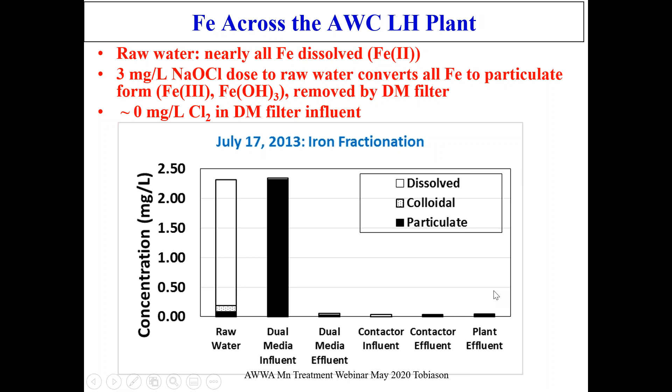Manganese is different - we have dissolved manganese in the influent. We add chlorine or permanganate to oxidize the iron, but it makes only a little bit of colloids, not much, and it goes right through the dual media filter because it's dissolved - that's what it's planned to do. Then we add chlorine right here. Contactor influent is still dissolved, but the contactor effluent is all gone, and that's how the manganese is removed.

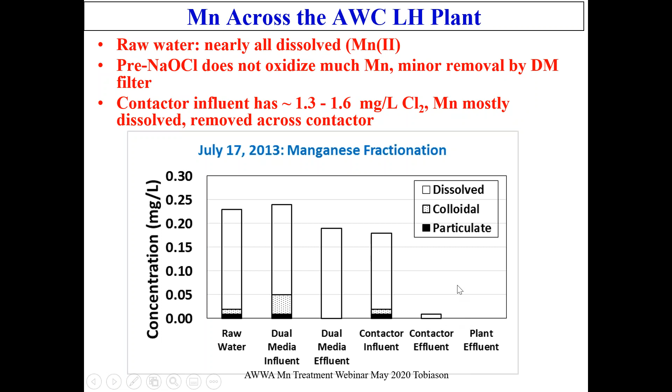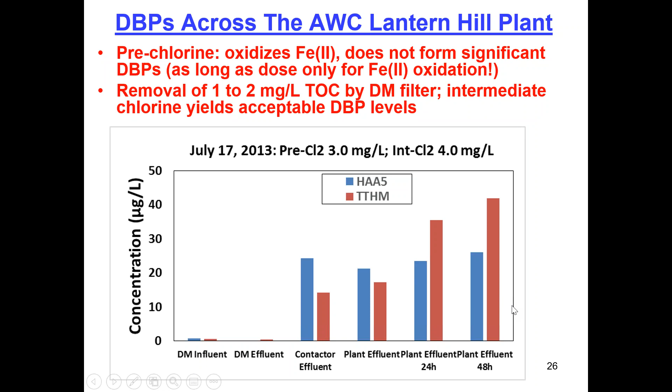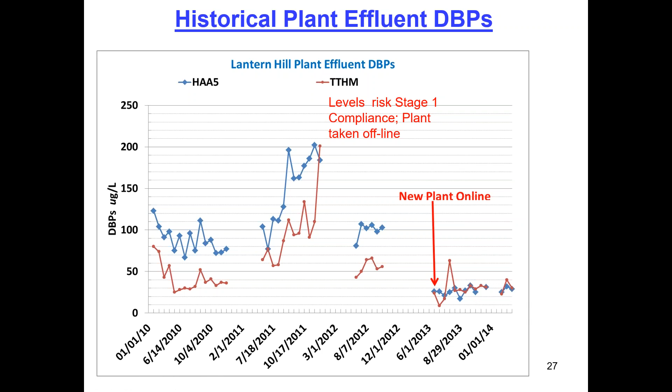The real story is that we don't make DBPs up front. The dual media influent and effluent, where we've added chlorine to oxidize iron, are low. Then we add chlorine and we do get DBP formation here. From the historical results, where sometimes HAAs and THMs were extremely high when the new plant went on, they were much, much lower. So that was the approach used there to deal with iron, manganese, and DBP control.

The last case I want to show you just went out to bid and will be built in 2020 and 2021, up in Maine for groundwater at the Brunswick Topsham Water District, Jackson Station. The current process is a single stage of intermittently regenerated manganese oxide media, green sand, with no NOM removal. There are moderate levels of iron and manganese and some TOC, but there was a THM production problem, so they looked to solve this.

After extensive piloting of a variety of options, we ended up at a place I had been involved in from the get-go and did not think we'd reach, but it turns out to be a 3-stage process with 3 different surfaces. First is the intermittently regenerated manganese oxide surface - they decided to stay with that to remove all the iron and most of the manganese. But it's fundamentally a breakthrough curve system, and you can't maintain 10 to 20 microgram per liter levels very well with this approach.

Then the water passes through a fixed bed anion exchange to remove NOM, the DBP precursors, which also doesn't remove any more manganese. Then free chlorine is added, and the water passes through a 3rd stage, a manganese contactor, which in this case is 36 inches of manganese oxide coated anthracite, done by that same method I mentioned for cerulite. It's operated up to, we tested up to 25 GPM per square foot, and that'll polish the manganese down to very, very low levels.

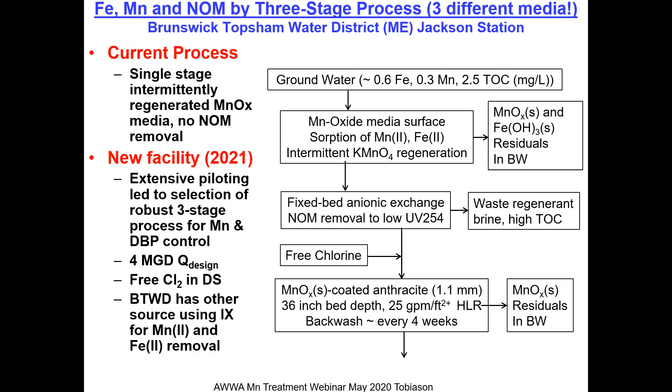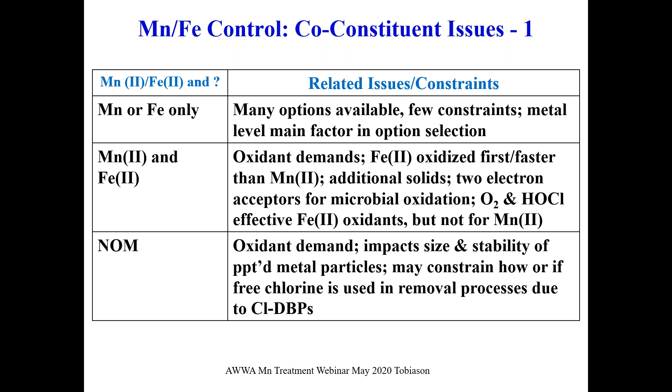So those are my examples, and I'll end with some slides to think about. I like to think about manganese and iron control from two perspectives: one is a co-constituent perspective, the other is a process perspective. If you have manganese or iron only, there are a lot of options, few constraints. With manganese and iron together, you need to think about the fact that iron is going to be oxidized first, and oxygen and HOCl can be effective for iron but not manganese. NOM has an oxidant demand, DBP precursor, impacts size and stability, so you have to take that into account.

I didn't mention this, but arsenic is also interesting when it occurs in groundwater, because we can oxidize As3 to As5, which is then removed better by iron oxides, which may also be precipitated, and arsenic's an oxyanion, which could also be removed by ion exchange.

Radionuclides present some particular questions, and if we have a lot of hardness, the calcium and magnesium are going to be important because they're removed in the ion exchange process. They do precipitate at high pH and have a chemical demand—lots of parallel oxidation reduction and precipitation processes. My point here is don't expect it to be simple, don't expect generalizations. Look at the source and act appropriately.

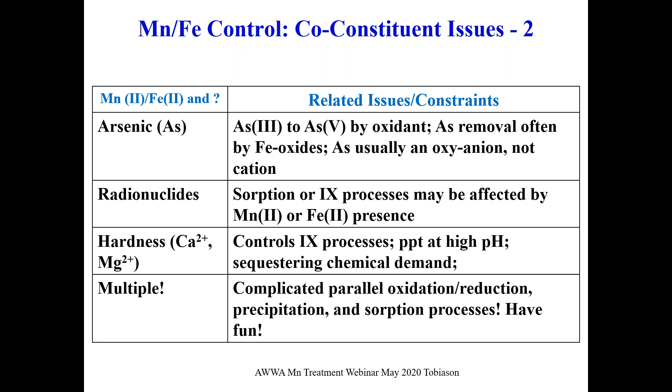Then the other side of this is your treatment objectives. If the objective is primary disinfection, your selection of oxidants needs to take into consideration whether the oxidant is or isn't also a disinfectant. And if your disinfectant is UV, for example, you better not have iron and manganese around to get oxidized and foul the sleeves.

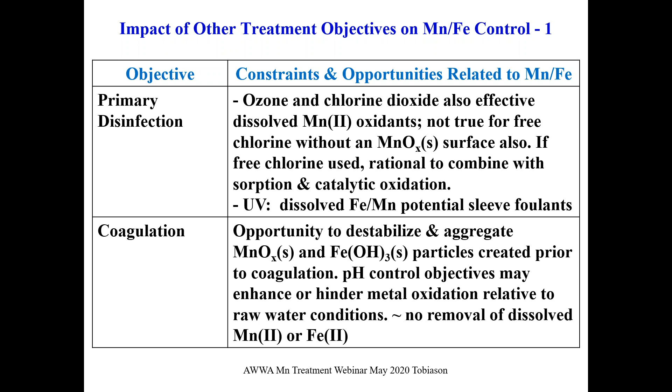With coagulation, we have the opportunity to destabilize and aggregate iron and manganese particles so they can be removed by processes that require destabilized particles. But on the other hand, if we have a treatment process such as MF or UF membrane filtration, we don't need destabilized particles—we just need to make particles by effective oxidation.

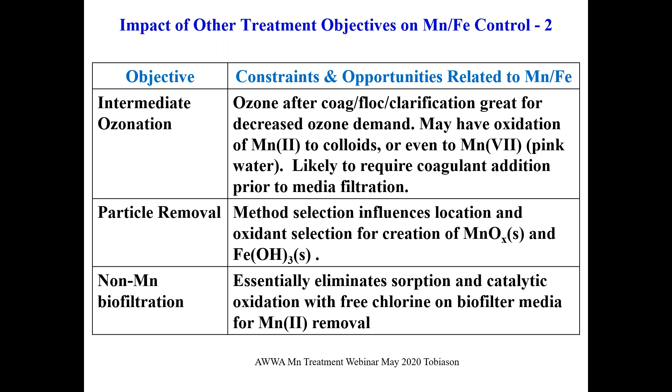And if you want to have biofiltration, that kind of eliminates sorption and catalytic oxidation with free chlorine on the biofiltered media. But there are other media processes that can be used.